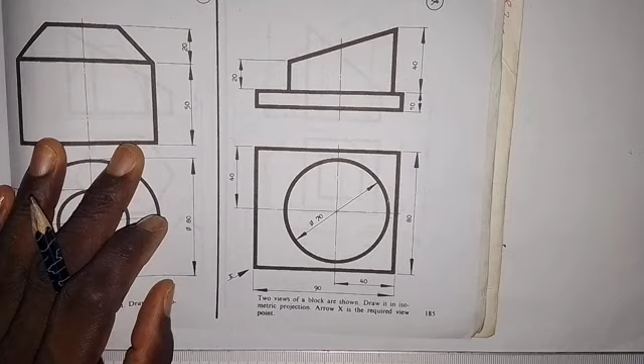Shining light. Here I'm going to explain to you how you can construct the isometric view of this object, as we are given the orthographic views of the object, and as we are told here that two views of a block are shown. Draw it in isometric projection. Arrow X is the required viewpoint.

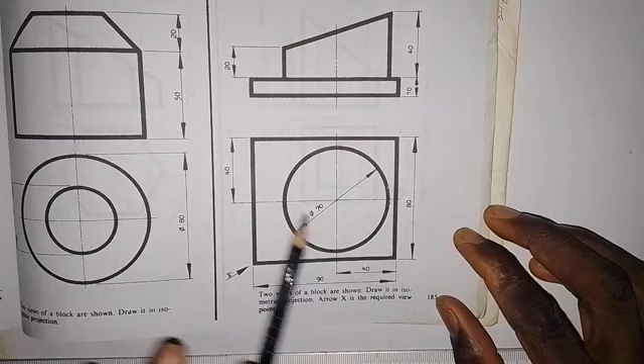So we are going to put this part together to get its isometric view as we are instructed. And this is the front elevation, this is the plan. That means the views are given in first angle orthographic projection. And let's look at the dimensions.

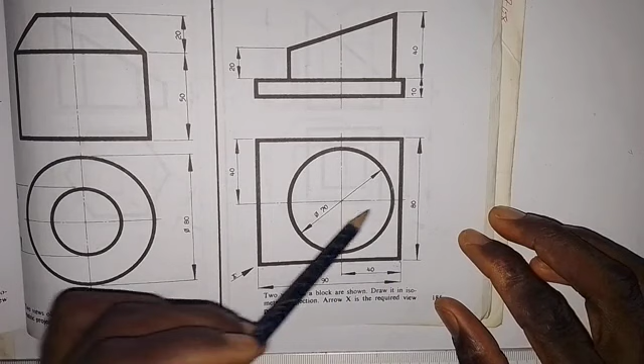So the plan, we have distance from here to here to be 80 millimeters, and from here to here is 90. And the center line of this circle from this end is 40 millimeters. And the center line of this circle on the horizontal part from this end is 40 millimeters. So those are dimensions that we have in the plan.

The thickness of this is 10 millimeters, and distance from here to here is 40, from here to here is 20 millimeters. So we are going to put this part together to get its isometric view. Now let's start. The first thing that we need to do here is to draw a horizontal line. Draw a horizontal line like this.

Okay, then we take our set square and we draw a line in this direction. So we draw a line in this direction, and we turn to this side. We also draw a line in this direction like this. Okay, so then we turn like this and draw a short vertical line. So we are preparing the base first.

So we take a measurement of 10 millimeters from this point. This is point X, which we are asked to take as the viewpoint. So we take a measurement of 10 millimeters up. And here we take a measurement of 90 millimeters. 90 millimeters from here. This is 90 millimeters.

Okay. Then here we also take a measurement of 80 millimeters from here. So this is 80 millimeters. So then we are going to draw a short vertical line at this point, and we also come here, we draw a short vertical line at this point. Okay, so then I will transfer this 10 millimeters.

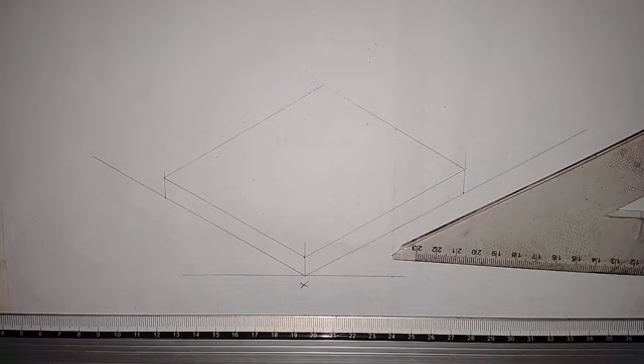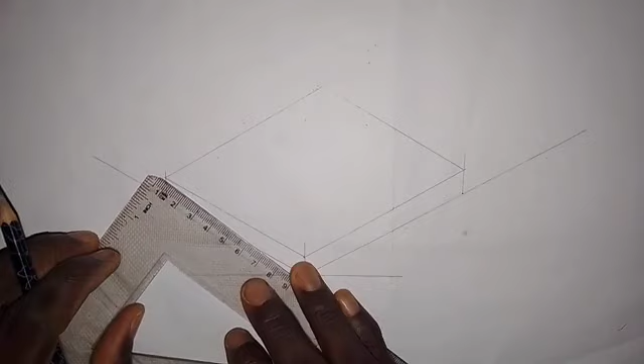So now let's prepare how we are going to draw the cylindrical part that is truncated. So what we need to do now is to take a measurement of 40 millimeters from this end. This is 40 millimeters. Then from this end here also we take 40 millimeters. This is 40 millimeters. So now we are going to draw a center line.

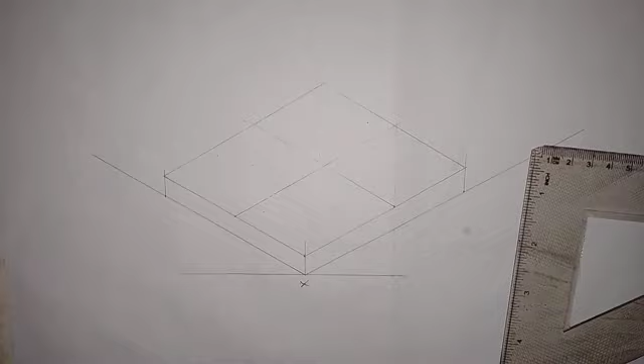Okay, from here to this end. Then we also do the same thing from here. So where we have this 40, we draw from here to this end here. Okay. Now for the cylindrical part, the circular base of the cylindrical part is 70 millimeters. That is, the diameter is 70 millimeters.

So that means what we are going to do is that on this line here, we are going to take a measurement of 35 millimeters from here. So this is 1, 2, 3. So this is 35 millimeters. So we also take 35 from here. 1, 2, 3. This is 35 millimeters here.

Okay, so then we turn to this side. We also do the same thing. So we take a measurement of 35 millimeters. 1, 2, 3. So this is 35 millimeters. Then again from here. 1, 2, 3. So this is 35 millimeters.

We are going to create an isometric square on this face. So look at the way I'm going to do it. So we draw a line here, and then come here, we also draw a line. Then turn it to this side.

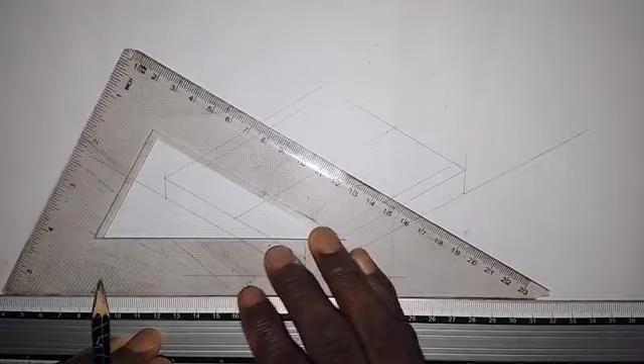So from here, we draw a line. Okay. Alright, so then coming to this side here. So from this point, we draw a line through this point. So we have the isometric square. So what we are going to do now, we connect the longest corners together.

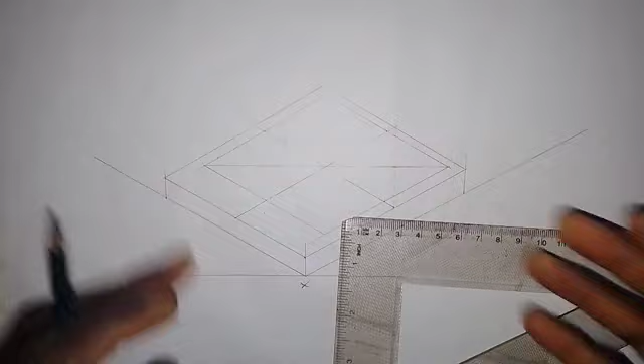So what I want to do here is to draw a part of the isometric circle at the base of that cylinder. So then we also connect this point here together with this point. So I will draw a line from here to meet this line, and then I will draw a line to connect these 2 points together like this.

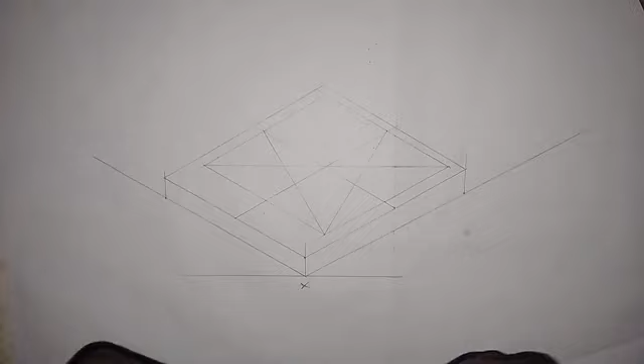So the next thing that I'm going to do is to take my compass, setting it at this point. Because it is the lower part of the cylinder, I'm not going to draw the whole of the cylinder, but I'll just extend to this point here. Then I will draw an arc from here to here like this.

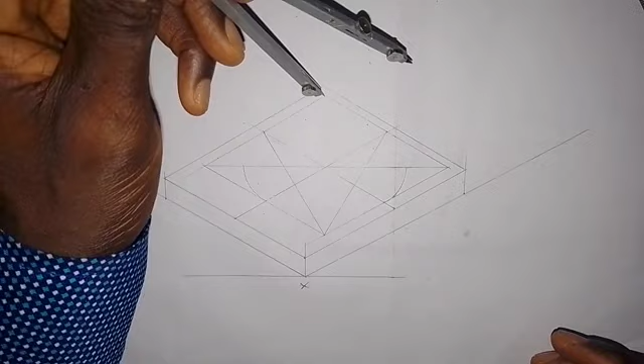Then I will also put it at this point just to touch the longest line. So I will also extend it here, and draw an arc just to touch this line like this. Then I will put it at this point here, extend it to this point, and draw an arc like this to connect these 2 arcs together. So this is the part of the base of the cylinder.

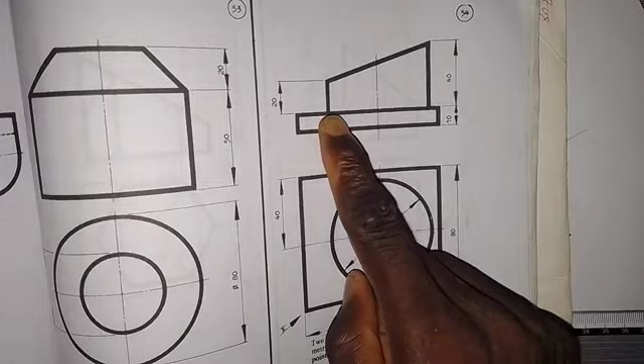So now, don't forget that the cylinder is truncated and we have it bent. The upper part is 40. So the part on this side is 40 millimeters from here to here, while on this side is 20 millimeters. So we are going to create something like that. So just look at the way I'm going to do it.

So what we need to do now is draw a vertical line at this point here. I will draw a vertical line at this point, and also at this point I will draw a vertical line. And at this point I will draw a vertical line.

So with these vertical lines that I've drawn, I'm going to take a measurement of 20 millimeters here. This is 20 millimeters, and this is also 20 millimeters. So here I will take 40 millimeters from this point up. This is 40 millimeters. And at this point I will also take a measurement of 40 millimeters.

So I'm going to connect these together. I'll connect these 2 points together like this, and also these 2 points together like this. Then here I will connect these 2 points together, and then I will connect these points together. So if you look at what we have here, this is not a square anymore.

It is not a square, because if we are to construct an isometric circle on an isometric object, we have to create an isometric square. So this is no more a square. So what we are going to do here to solve this problem is to create an isometric square on this face.

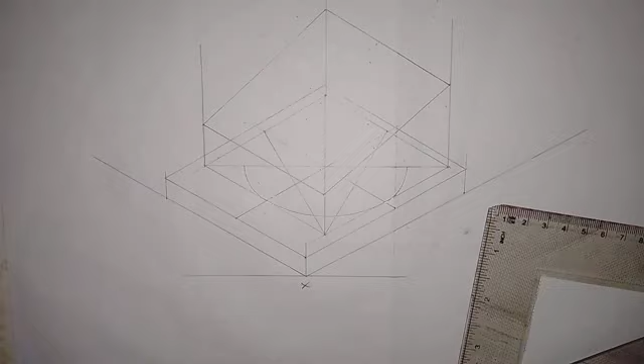So the length here is 70 millimeters. If you check, this is 70, and this is more than 70 now, because of the slant. So what I'm going to do is get the midpoint of this. This is the midpoint. Okay, so this is 40.

Then I will come here also and get the midpoint, which is also 40 millimeters. Then I'm going to connect these 2 points together like this. Now the next thing I'm going to do is divide this 70 into 2.

Divide this 70 millimeters into 2. That is 35 millimeters, and this is 35 millimeters. So coming here now, I will also get that same 35. This is 35 millimeters here. So I will connect these 2 points together like this. Connect these 2 points together here like this.

Okay, now the next thing I'm going to do is take a measurement from here. I will take a measurement of 35 millimeters on this line. This is already from here now. From here, this is 35, this is 35. But here, I need to take 35, 35 here. So I'm taking 35 millimeters from this point.

So this is 1, 2, this is 1, 2, 3. This is 35 millimeters, like this. Then here also 1, 2, 3. This is 35 millimeters. So now I'm going to draw a line from this point. So I'll draw a line like this. Okay, I'm coming to this point here. I will also draw a line like this.

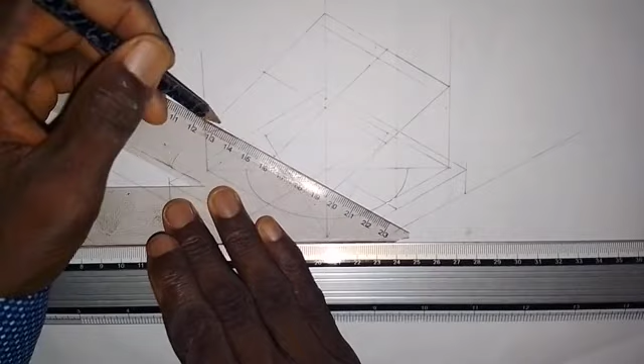Okay, so I've created an isometric square on this face. As you see it here, I've created an isometric square on this face. These are the ends that we have here, this point, and then we also have this point and this one. So what I need to do now is to connect the longest diagonal, to draw a diagonal of these 2 points like this, as we did for the down one. So I'll connect these 2 points together like this.

Okay, so having done that, this point that we have here, I'll be connecting it together with this point. So I'll connect this point to this point. So be very careful with the point. So I'll connect these 2 points together, and then I'll connect these 2 points together.

Okay, so we are using the 4 center method. So this is one of the points, and this is one of the points that we are using. So if I write 1 here, this is point 2. This point here will be point 3 or center 3, and this one here is center 4. So getting this now, I can go on and draw, putting the pinpoint of my compass here. Let me start from 2 here, extending it to this point. I can draw an arc like this.

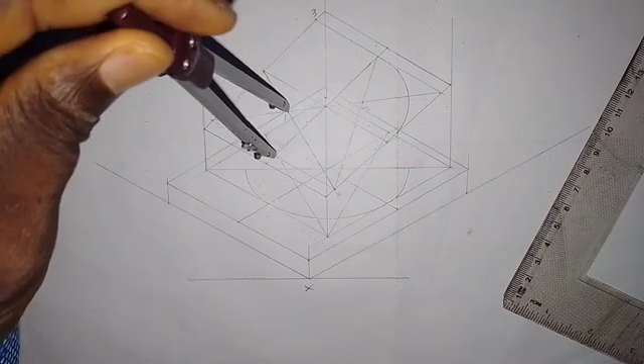Okay. So I've drawn this arc here using center 2. So if I put a center 1 here, so it touches this point, I can also draw an arc from here. So it goes like this, touching this point. You can see how I'm doing it. It's very simple. So we have it touching this point like this.

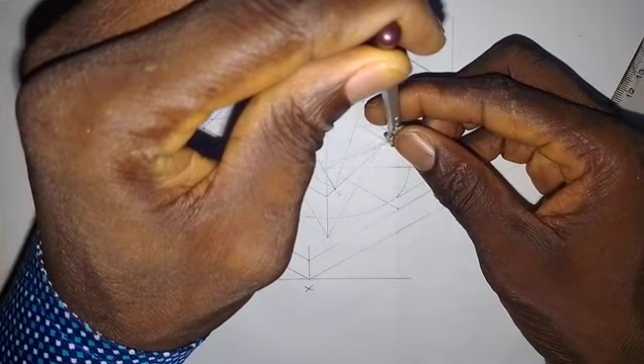Then next one is I put a center 3 here. Center 3, extending it to this point here. Then I will draw an arc from here to meet this point. Okay. Alright, so we have drawn that. So then I'll put a center 4 here. This is center 4. So putting it here, I will draw an arc like this to meet this arc here like this.

Okay, so looking at what we have done here, I'm connecting these 2 points together like this, and also I will connect these 2 points together on the longest diagonal. So the next thing that we are going to do is that I need to make this line a thick line. So like this, and this line also. Then this line also, make it a thick line.

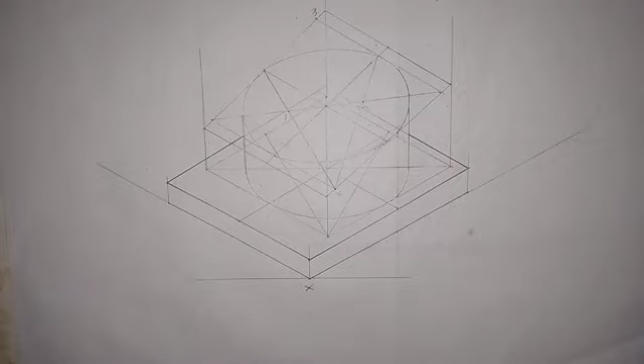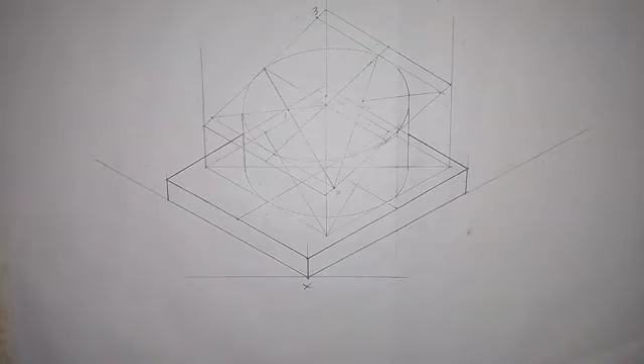Okay, so make this line a thick line. Then make this line, from here to here. Okay, so then we also make this a thick line. So this is how the object will look. So I also need to make this line a thick line, and this line a thick line. Alright, so we are done. So this is how the object will look in its isometric form.